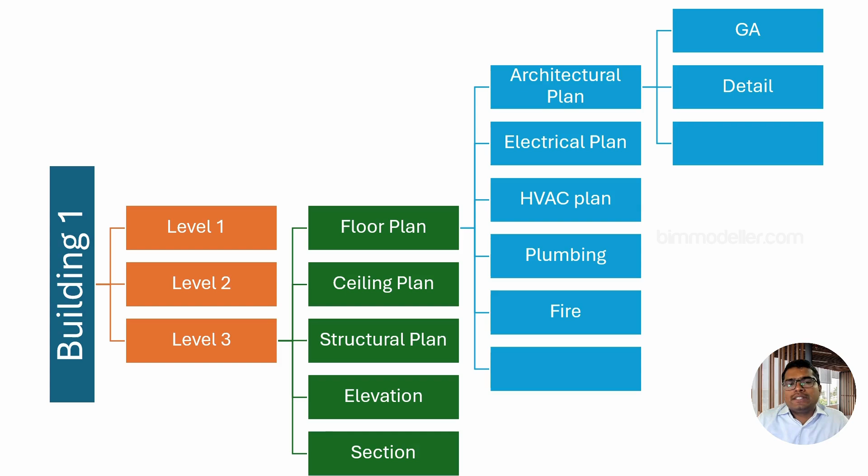So what do we do? We control them, filter them to only that particular discipline, not the other views. This way, each of us will have control over the drawing.

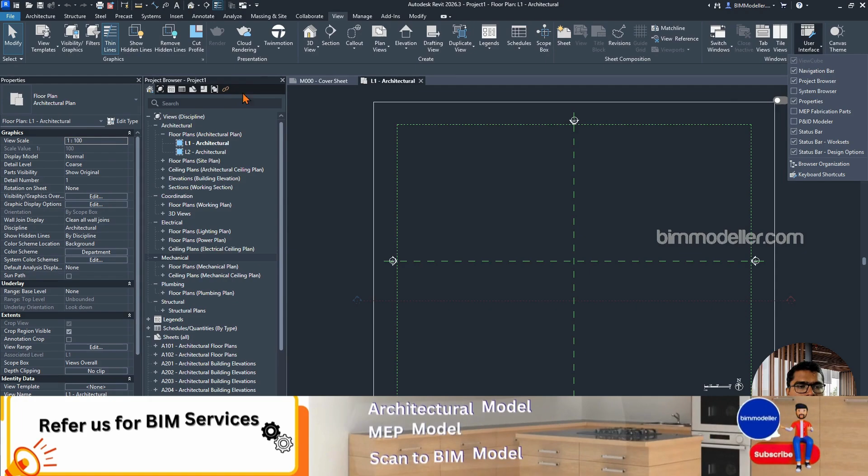This is a default template that I have opened. I have a properties palette here and a project browser here. I'm using Revit 2026. If you are using a previous version, you may not have these project browser buttons. If you don't have a project browser, you will find it under the View tab, under user interface, project browser.

If you're using an older version, you may not have this level of control. In previous versions, you can have all, or you can have only views, sheets, schedules, like that. Now it is separated. It is very useful.

In the previous version, you may not be able to search particular elements—you had to right click on them. Now you can type it automatically and it will show detailed options. Previously you had to right click and go for search options to find elements. Now a search button will be there, and you will be able to find the views you are looking for. It was very tedious and challenging to find the right views.

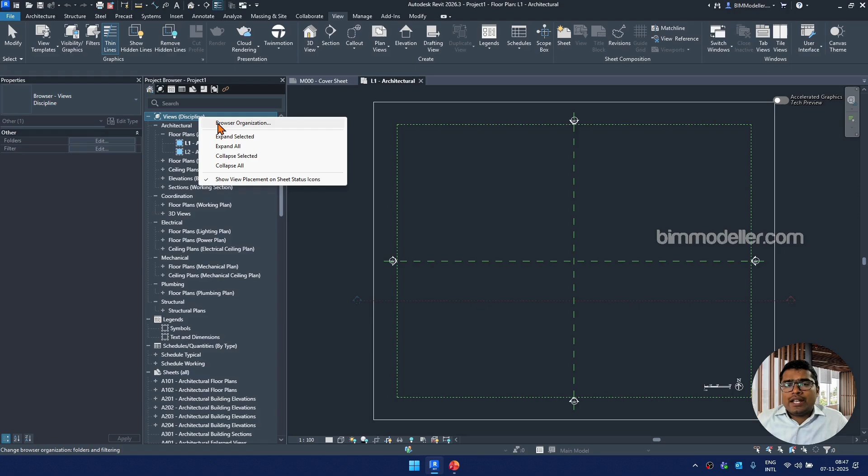So when we are doing this browser organization, this is the setting. As I said, this is the project settings, and once it is done for a project for a client, it can be replicated—it can be saved as a template file. There are many settings related to the template, and this is one of them.

So this time it shows all available options based on the discipline, and these are the default settings. When we say all, you can see structural, floor plan, architectural, lighting—it shows them in a differentiating way. In the same way, you will see on the other side the browser organization, and you can go ahead.

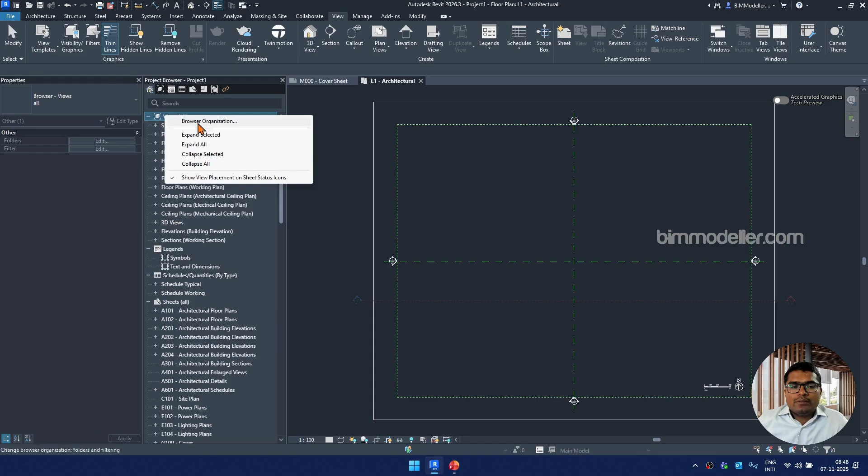In the previous older version, we only had the views option to control, but in very recent times they introduced sheets, then schedules, and now they have panel schedules also. You will be able to categorize them and have control over what panel you have, which is very useful when doing this.

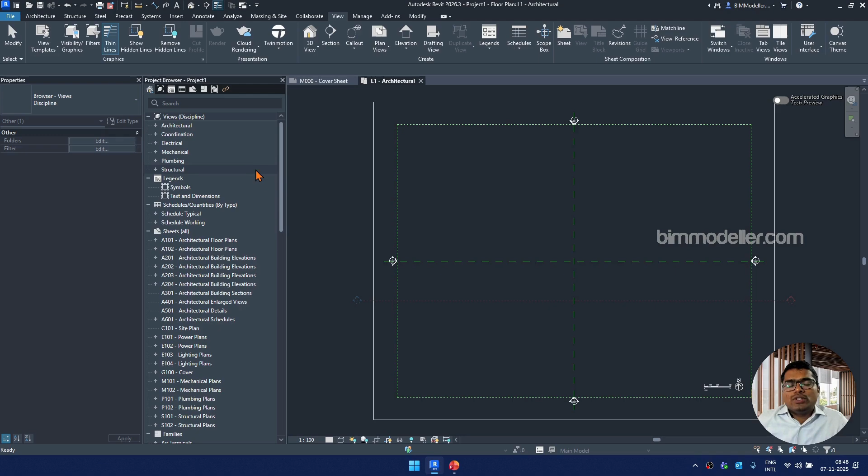For discipline, what you need for this to work is a property for each view, so that the property value will be assigned. That particular property value is used in the view browser organization. So what property are we calculating? In this case, if I select architectural, you can see how it is categorized under the architectural heading. On the left side, when selecting the view, you can see that discipline parameter—it says discipline: architectural.

If I open other views like mechanical and select it, the value automatically changes. So we have to create a parameter—it shouldn't always be discipline; the value could be anything, and you can have multiple parameters. Discipline is one parameter. We usually also need one for whether it's a work-in-progress file or a sheet, so we have two parameters—automatically indicating if it's for our working purpose, kept as a separate one.

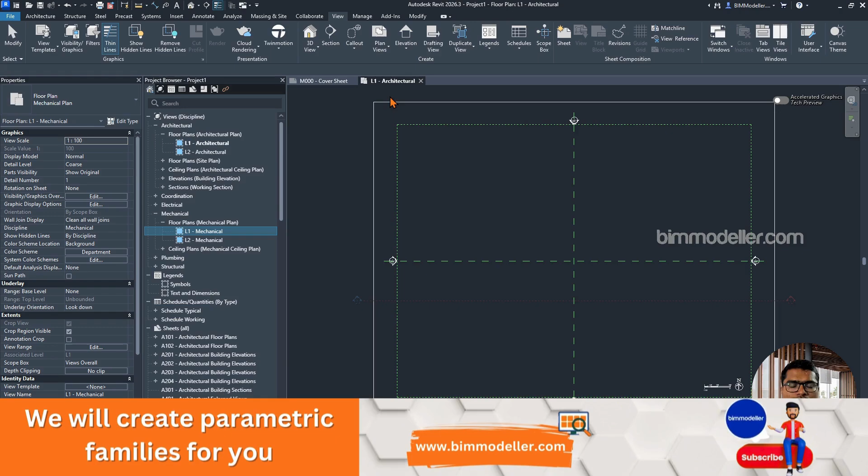So in my case, let me go ahead and create another parameter. We'll have a manage project parameter—you can go and check that.

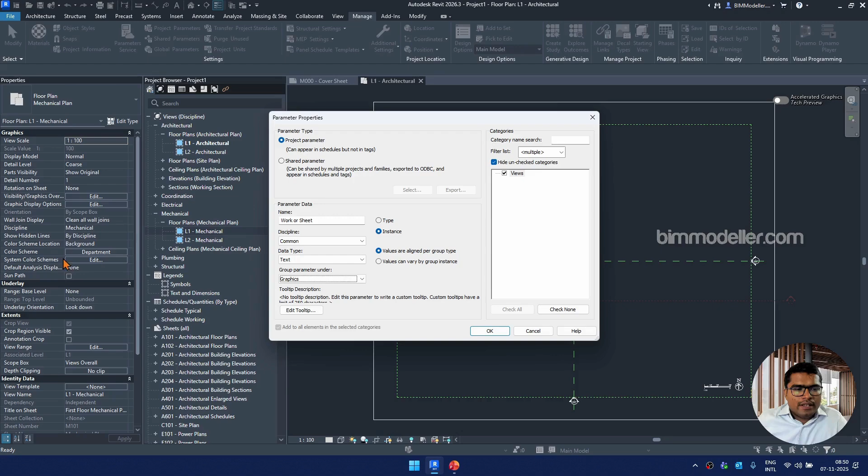We can do it here as a new parameter. Let's say this applies to the view, and I will make sure it comes in the instance property. The name will be 'work or sheet'—I have to enter two words for this, and we should not use the backslash since it's considered a divider. I'll name it like this, as a common text value, and it's going to come under the graphics option, similar to the discipline parameter. Once done, I can select OK.

It asks: would you like to assign the value for this parameter to the currently selected elements? No, I don't want to do that, so I select OK. Now if you see this option, we can select the element and it must show work or sheet where it comes. Let's say we have to assign this for all the parameters or for all the views, so we can take the schedule and do that.

So this is for the work in progress file. So when I assign this, automatically the property will be assigned.

Nothing happens here. What we have to do is go to the project browser organization. Now you will be able to see that grouping, and under grouping, you will be able to see the settings and how it appears.

Discipline comes first, as a category of architectural group separately, and then family type. Family type in Revit is nothing but floor plan, ceiling plans, elevation. How do you want to categorize them?

So you can see floor plan, and after that in the same architectural tab, you can see floor plan, site plan, ceiling plan, elevation, sections like that. So in that way, second should be grouped like that.

Third, nothing is there, so I can go ahead and say based on whether it's for a work in progress view or whatever purpose it is for. So I can select like this.

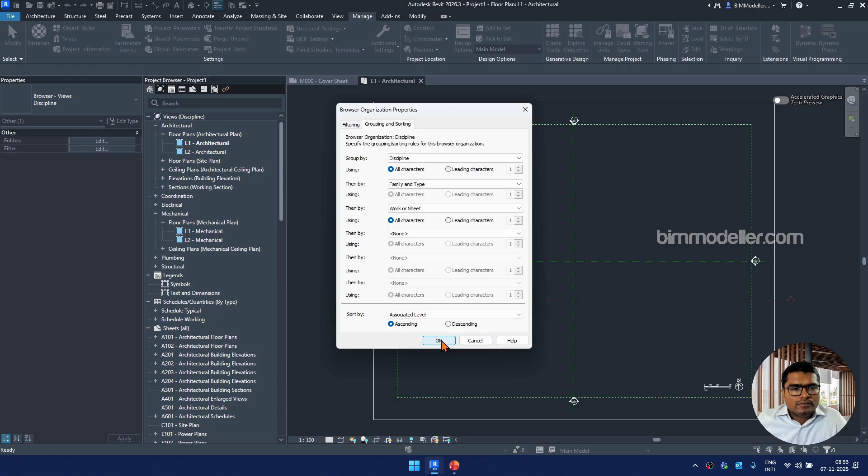As I said, if you need only electrical based on the discipline, equals to only mechanical - let's say mechanical, because mechanical is the floor plan that we selected as the work in progress view. So I will need only mechanical.

I can select OK now. When you see this, as I said, the question mark will come. The other views are for sheets. We have to assign that parameter.

So now if you see, there are no other plan views, no architectural floor plan views, only mechanical is there, and under that there are two categories that you can see. One is Mechanical L1 for the other remaining level 2.

The other view is related to the property we assign as work in progress. The other view I will also assign as work in progress.

Now, once it is done, these two I will be working on in the project. I have to duplicate the same, and keep it prepared for sheets separately. So work in progress is separate and sheets is separate.

We can duplicate a number of views, but we can have control over them - what needs to be grouped under what, so that it is grouped and organized, and we will be able to see them in a proper way, so it's easy to handle instead of having hundreds of views listed underneath.

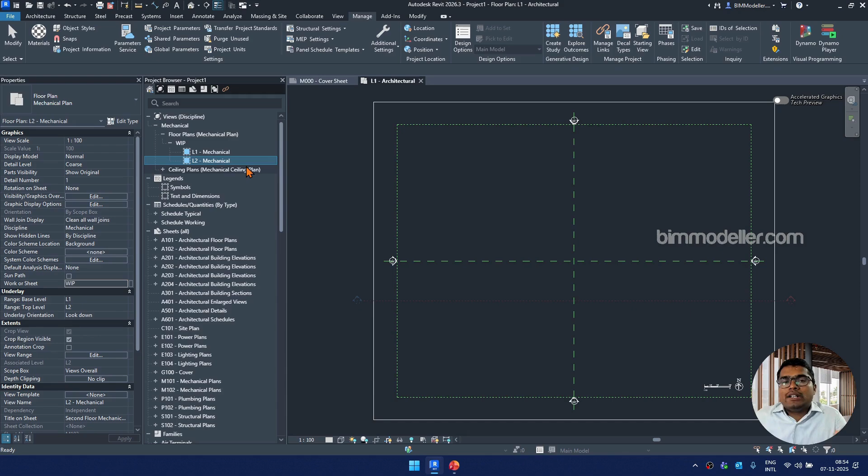So clearly, the points we learned are that we are able to group the views and segregate and filter them to only the views we need, and we can have different parameters. That's the important thing - for each property we can create a different parameter, and assign the parameters to the view, and organize them based on that particular parameter.

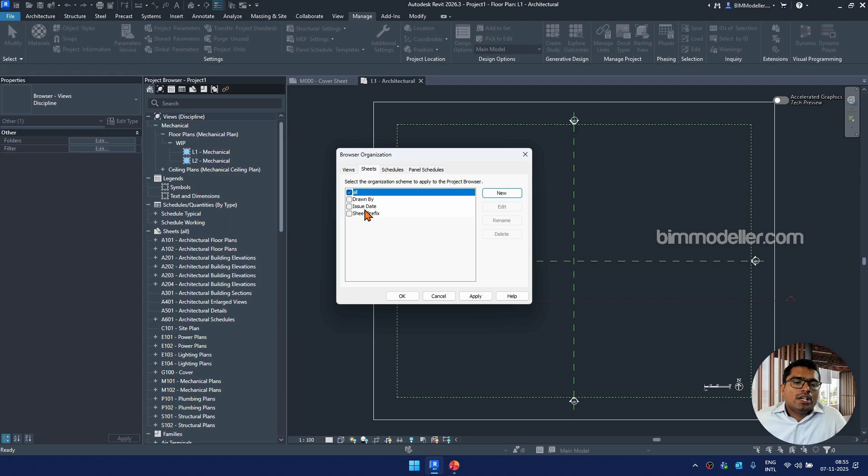The same happens with sheets, schedules, and panel schedules as well. Based on who drew it and the issued date, we can also categorize them that way. That's possible in this. So do let me know if you have any questions related to this, and we will address it as a separate doubt clarification video for you.